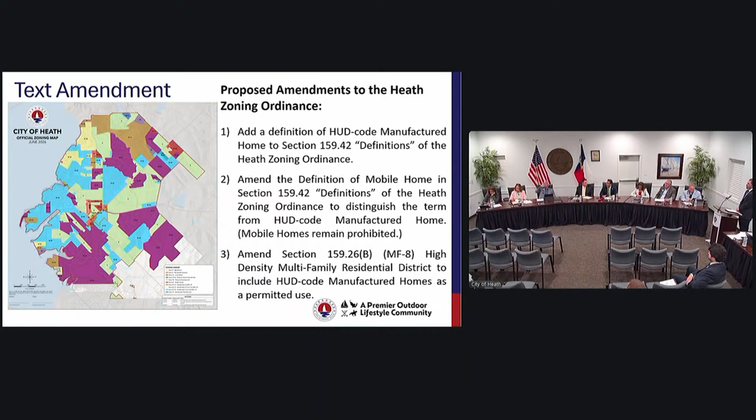We started looking across all the different future land use of the city of Heath. Heath is very dynamically different, as I get the opportunity to talk to mayors all across Northeast Texas. We're really more rural estates, and our lowest standard is one home on one acre. But we do have a future land area that's been dedicated to this type of affordable housing opportunity, and it's been there for a very long time.

I even reached out to some past council members, in fact past Mayor Pro Tem, and asked them about this. In their terms, they kept this and said, hey, this is what that's for. I thought this was a great recommendation by staff, that this would be a small footprint that would allow for that potential opportunity. That doesn't mean that's actually what will go there, just that we need to make sure this is codified within our ordinances.

At this time, the floor is open for any discussion, council.

Councilman Dotson: Mr. Mayor, I think you know my feeling on this. I feel this is an egregious overreach by the state. This is one in a long line of reclaiming zoning for people in Austin who feel they know what's best for municipalities through the state, when many of them have never even governed in municipalities in this state or any other. We were not consulted on this. We were not queried. There were no forums on this, even though this bill had made its way into committee on four different occasions.

As you mentioned, our state senator clearly voted for this and continues to advocate for zoning control in Austin, and our state representative did not. I think this is zoning encroachment, plain and simple, and this equates to a state taking, much like a regulatory taking if we're looking for easements or anything else. No one likes to be put upon without actually being consulted or having a say or a seat at the table, and in neither case did that take place here.

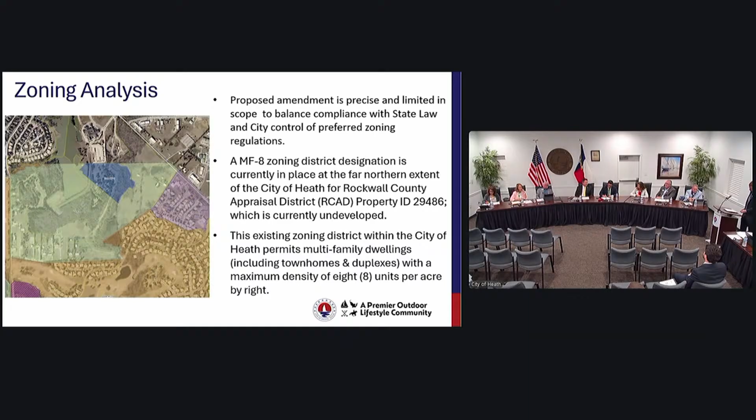Very well, at this time we'll move into agenda item number 6. These are items for individual consideration. 6.A, discussion and action regarding the compensation for the municipal court judge and the associate municipal court judge.

Mr. Alexander's on here. Ms. Gordon. I caught myself, I even wrote it out. You did, I appreciate that, Mayor.

So the item before you this evening is to discuss and act on compensation updates for our municipal court judge and our associate judge. Both our judge, Tim Hartley, as well as our associate judge, Roy Stacy, were reappointed last month to serve as our municipal court judges to assist with our municipal court operations. And so as a city, we have been reviewing our municipal court operations as a whole, which also included looking at the compensation of both our judge, associate judge, and prosecutor.

And so in doing so, we reviewed some operational items as well as studies from comp cities and realized we were a little bit below market. And so we want to make sure that we are remaining within market for our pay for our hardworking municipal court judge and associate judge. During our budget, we also accounted for potential increases in pay for both of these positions. So this evening, we are recommending an increase from $175 hourly for their services to $200 an hour for their services. We are recommending approval of this item, and I would be happy to answer any questions you may have.

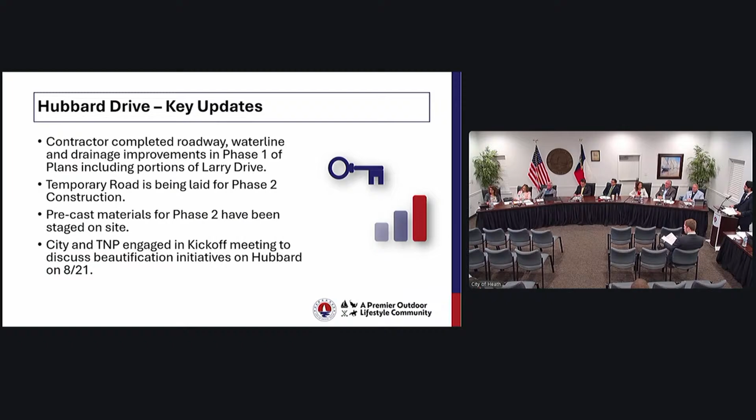Another thing we did, which you don't see on this slide, is coordinate with our Freeman Milliken, who is our design engineer for the 2026 fire improvements. He's looking at how we can connect this beforehand during construction so that way we don't have to bore underneath the roadway and get it taken care of now.

The detour I don't have up here, but it used to take you around and clips off almost close to half a mile to about three-quarters of a mile as it goes around. This detour will be for the northbound. We plan on having phase 2A, the southerly portion of the road, finished in mid-October of 2026, with a scheduled completion at the end of December for the whole project.

Next, I'll go into some photos so you can see the progress here. This is Hubbard Drive, taken looking southbound. This is a 36-foot wide pavement section that we now have. You can see the broom sweep finish. The traffic control is still up in this photo, but what I want to showcase is the next slide, showing what the road used to look like.

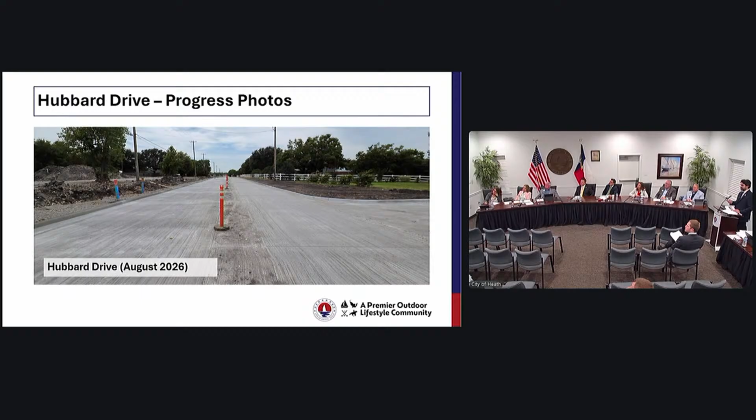This is also Larry Drive, which was also paved. You can see some of the formwork for the storm drain, which is crucial for this roadway. If you remember from the budget workshop, I talked about how some of the drainage improvements would be happening here on Larry Drive, which is going to be key for keeping that roadway and pavement good for years to come.

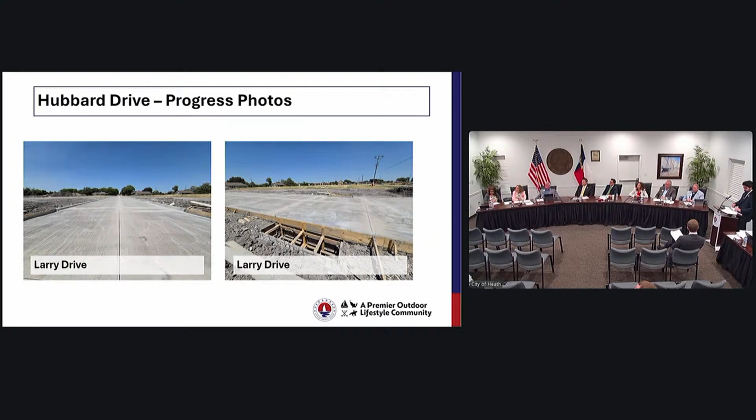I also wanted to showcase some of the precast materials being stored on site. These are 48-inch reinforced concrete pipe along with some 6 foot by 3 foot boxes. This just shows that the contractors ordered the precast materials. Sometimes these have a long lead time, and they've already got them on site ready for their phase 2 progress. I'll take any questions on this project if you have them.

Council, any questions? None at this time. Thank you.

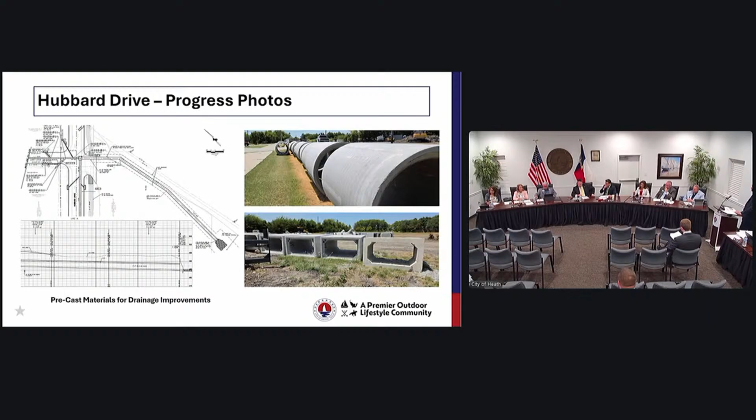The next thing I'd like to go over is the Hubbard Trail. This is the best exhibit I have of it, but it runs along this red line connecting Heath Golf and Yacht Tract 10 to Heath Golf and Yacht Tract 14. If you follow my cursor, you can see the outline of it.

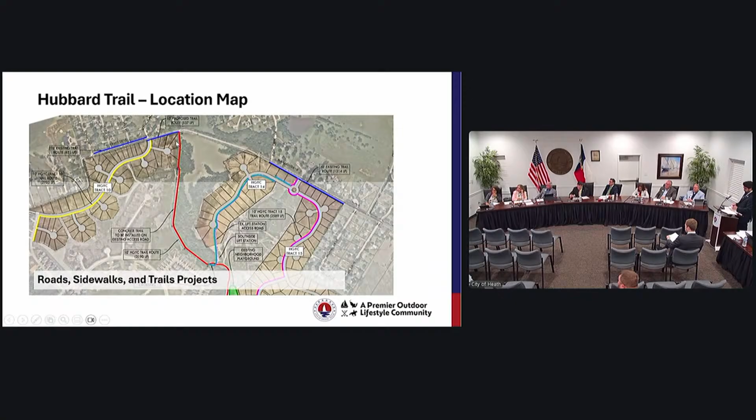Most recently, we were waiting to hear back from the City of Dallas, but I decided to look on their agenda items at the City Council, and it looks like our trail and sanitary sewer easement, along with the temporary workspace agreement, was approved on the August 12th City of Dallas Council meeting.

Our next steps are to coordinate with the developer further to see where we're going to land on this project. It's kind of involved with both the city and the developer from Heath Golf and Yacht, because we also have a lift station that's going to be decommissioned as part of the construction of this trail.

I have a little exhibit there of that easement that we acquired as well. I'll take any questions on this one if you have them.

Very well, council, any questions? Councilman Dodson asked, what's the estimated time of construction and closure on this?

Thank you for that question. I talked with Rob, who let me know he's ready to go, but one thing we want to ensure is that this trail is fully ADA compliant, because this road has some areas where water crossings are, and actually one of them washed out. He said once we're final on design, he can be ready to go and have it done in 90 days from beginning of construction to end of construction. How we get there is really the next step we have to discuss with them, to make sure it's fully ADA compliant for that trail.

Understood, thank you very much. Any others?

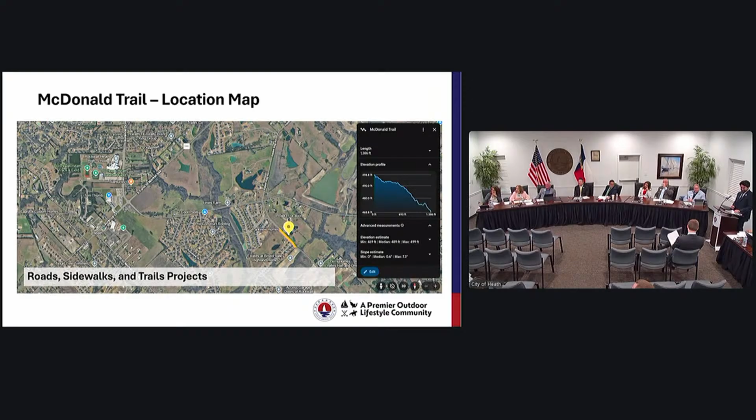So next is McDonald Trail. We provided final comments to the designer for the construction plans. They're very minor updates; we just wanted to make sure a few things were worked out for constructability.

We're also in the process of getting them to update the 4 easement deeds along McDonald Road, because there were some small discrepancies between what we're seeing on the plans and the right-of-way plats. We want to make sure the easements actually acquire what we need for the trail. Once that process is completed, we'll want to coordinate with the third-party utilities ahead of time, because there's a guy wire that needs to be moved as part of that trail on the plans.

So we're trying to be proactive about that. The city has received the remaining funds from the developer for construction of this trail, and the preliminary schedule is about 3 months to have the final completed construction documents and easements. The critical path for us is going to be the easement acquisition, and then another 3 months to construct, where the critical path will be utility coordination.

Okay, very good. As you're looking at this access, are you looking at the back property as well? Correct, we're looking at Stoneley, the connection of the 2 subdivisions in the back of Stoneley to this one, Bristol Valley. That matches the master trail map. Thank you. Mitch, did you have a question?

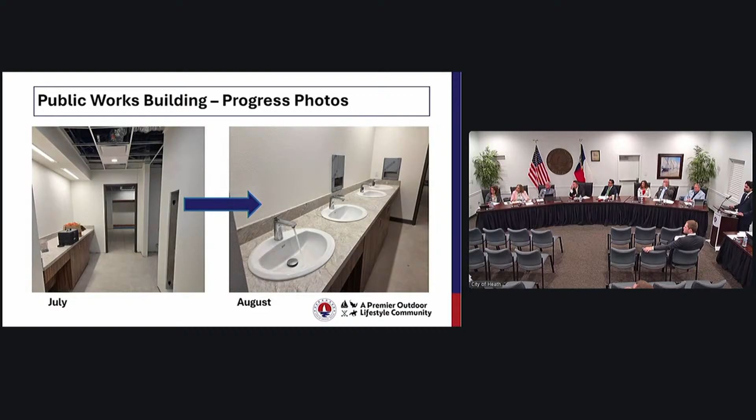I'm ready to take any questions on this one. No questions, great job, great job to staff. I know it's been a long time coming. I love the color scheme. Ms. Gordon, great job.

That was a joint effort with our Public Works staff and our Public Works administrative assistant, and they tried to keep me out of there every time I'd walk through. I'd go, wait a second, I don't know about that color, that looks like that mortar I was not happy with. I'm just kidding, no, you guys did a really good job.

Looking forward to, what's our move-in date? So right now, we're at the stage with the contractor where we're trying to ensure the quality is where it needs to be at.

Even before the furniture, one thing we looked at is we actually did a pre-punch walkthrough to make sure, before you get all the furniture set up, let's walk through the area, make sure there's not any exposed nails, drywall screws, anything like that inside the building. We've been communicating with them consistently, almost daily. But right now there's one thing holding us up, and it's a fire inspection. So that's really what has to take place.

And it's not on the chief, I just want to make that clear. What the contractor was telling me today is that he was going to get all the remaining signage for the riser room in the fire areas that need that to pass the fire inspection, and he was working through that right now.

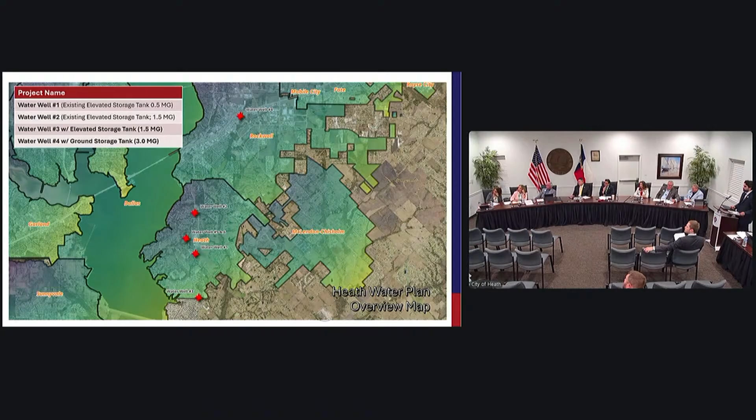So well number 1, I did want to give an update since the last update you had was that this pump was not operational. We have a temporary pump in this spot. It has been replaced and is now working.

The Public Works team worked closely with C. Miller Drilling, which is our contractor for it, and they replaced some bad electrical equipment, as well as they replaced the pump. One thing that we learned in this process is that we do need to have a stockpile of some of these electrical items so that they're ready to go in the future.

And so I think when we get our permanent pump, that's gonna be a lot different. But these ones, because it was a temporary pump, we also didn't have some of these fuses or capacitors in stock, and it could have been the pump itself too, in fact, so it could have been a number of things. But when we tested both out and replaced both, it ended up working.

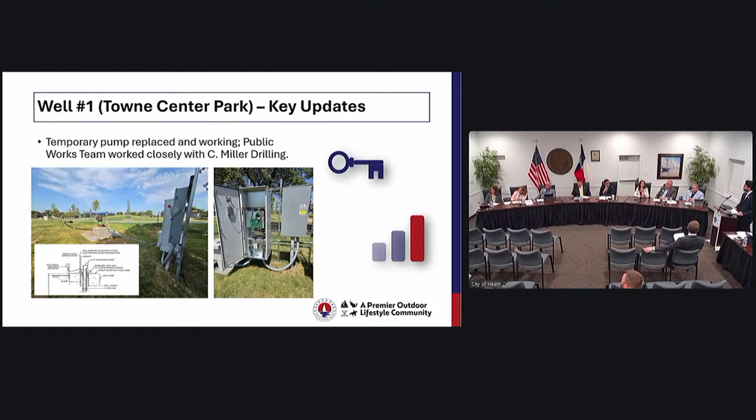One thing I wanted to go over is the schedule for water wells 2 through 4. So on page 38 of your packet, this is the newest update provided by Kimley Horn. What I do want to note with this Gantt chart is there's about a 2-week shift in the timeline.

And that came from needing to acquire the temporary construction easement at the Heath Golf and Yacht Club at well number 3. So it's not too much of a difference. Some of the items may slide over just half a month or so, but this is a 1-month Gantt chart.

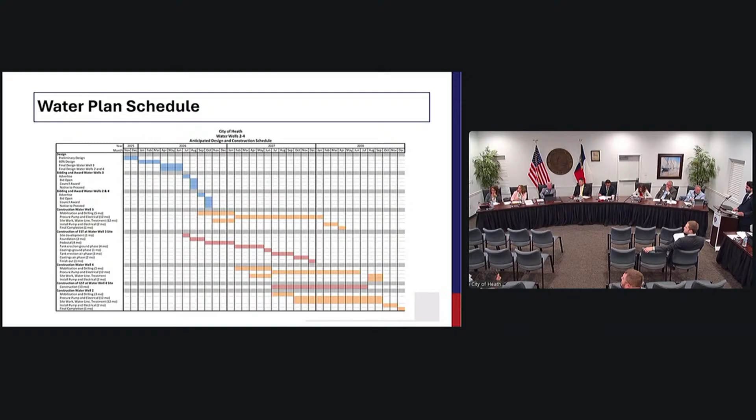For well number 3, it was currently open for bids. That closed today. What I will tell you is we have 2 bids that are underneath the OPCC right now, so we had 3 bids total. Our OPCC for this was about $7.3 million, and so that was great news.

The elevated storage tank had a pre-construction meeting, as I mentioned, on August 20th, and we also received conditional approval to construct TCEQ water well number 3, giving us that conditional approval for the well.

Water wells number 2 and 4, very similar update. These ones are not in construction, but we did also receive conditional approval for the construction of wells 2 and 4. Any questions on those before I move on?

Councilman Dodson: So with water well number 3, we have water well number 1 coming online on or about next summer. When is water well number 3 projected to come online?

Let me take a look actually at the schedule I provided. Number 3 on the Gantt chart is December 2027.

Gotcha, yeah, correct. Second question, given the long pole in the tent here is always the pumps, whether it's a submersible pump or one of these big monsters that we're waiting on for maybe a year, is there any way to pre-order some of the components so that we can shorten that cycle in the likely event that we will need a spare and won't want to wait an entire year before one comes available?

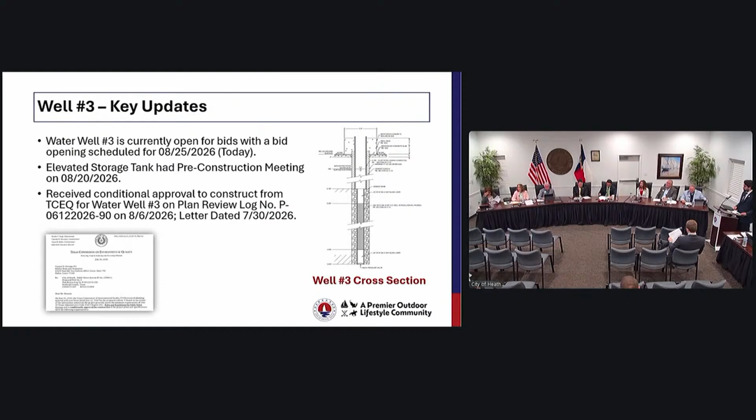If there's nothing else, I'll go into our fire flow enhancements. So I'll talk about Candlelight, which is currently in construction, and maybe this is the first time you've seen this, but the 2026 fire flow projects are in design, and I'll touch on that in just a moment. So the Candlelight fire flow, in location, is by the high school, right over there.

Trying to remember what that's Terry Lane that branches off of. Yep, that's it.

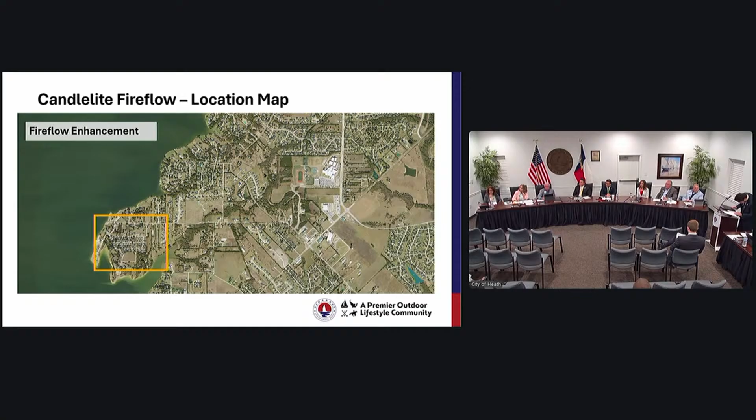And so, some key updates for this project: it is currently at 50% construction completion. The work began on June 24th, 2026, and right now we still have an estimated completion date of December 2026. I put weather permitting in there because there may be some rainy days, but they've been moving quite fast. If you look at this map, I'm showing how much of the main water line they've actually completed boring for.

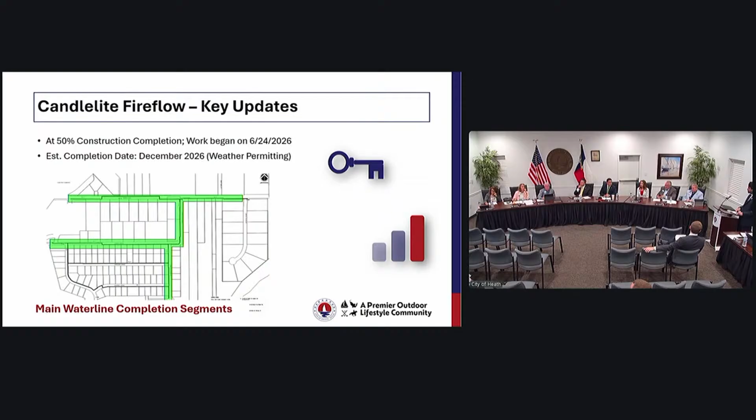Most recently, they completed the south portion on Candlelite, which is this segment right here, and they also completed on Lemmy Drive, this portion right here as well. So I'll go into a few photos. One more important update is that they are going to connect the 8-inch line to the main line tomorrow, that's one of their items they're going to do during the day.

Here I wanted to showcase some of the construction they're doing. You can see one of our brand new shiny fire hydrants in the photo, along with crews working in this spot. They're using a soil displacement hammer to bring that connection, the blue tube on the left, over and underneath the roadway, so there's no open trenching on our pavement. They're doing this all underground, driving in and pulling that HDPE line back through. You're also looking at one of those corporation stops on the HDPE line, showing the connection that's going to service these homes for water service as well as irrigation service.

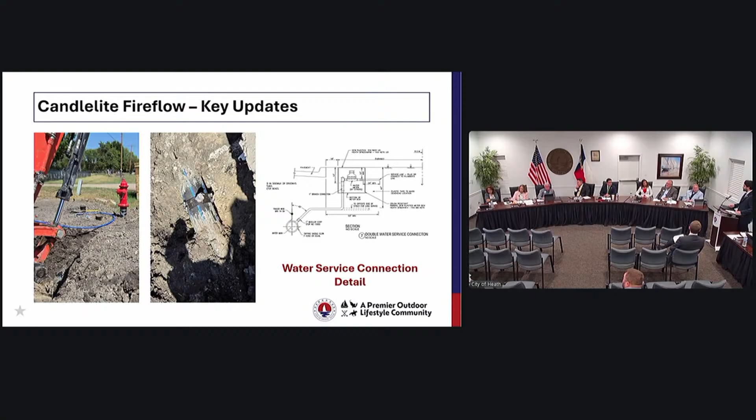So the last update I have is for the 2026 fire flow projects. This is a location map, also provided on page 39 of your packet. In discussing these projects with Freeman and Milliken, they'll be at 30% design by the end of this month, so we're expecting all these green projects to have a construction notice to proceed by the end of the year. The two other projects, 6 and 4, Hilltop Estates and Las Lomas Loops, are more complicated because they're next to bodies of water. One actually loops around an entire lake, so we're making sure we have the proper offsets for construction. The Las Lomas one is also complicated because it goes through a tree line, and we're trying to conserve as much of the trees as possible and find the most optimum alignment to avoid destroying trees in that route.

Any questions on this one?

No questions. You said the engineering firm plans to be done by the end of the year? Yes, at least for these, the ones in green. For the red ones, number 6 and number 4, we're working with them right now, looking at the alignments they provided to ensure that's not going to cause any issues. They're relying on us to do a little background work — that's where we last left off. To get those moving along, we just have to review everything to make sure we're not demolishing too many trees or causing an issue with the water.

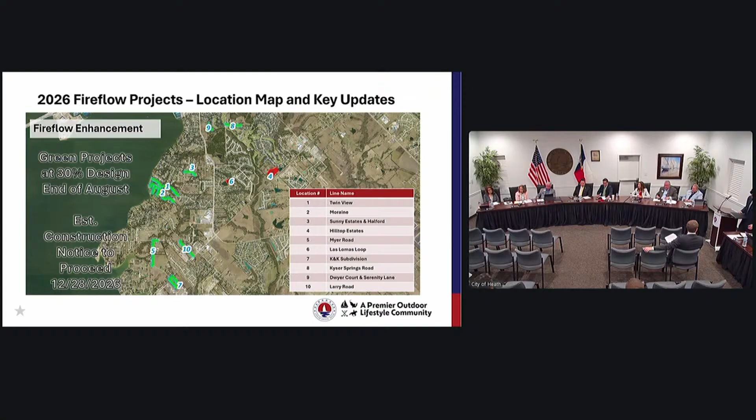Thank you very much, great job. I saw into an engineer's mind in that presentation. That was great.

Is that your first presentation in-house? I like it. Very exciting to have an engineer on staff in the city of Heath, and we're very proud to have you.

All right, moving into agenda item 6D, discussion and update on the construction of DPS Station 30 and 31.

Chief Seery: Good evening, Mayor and Council. Tonight I have Marcus again from AGCM to do a presentation on the construction of 30 and 31. The most exciting thing I'm happy to tell you is Thursday the contractor will be on site for 31 to start going vertical with that building. Terrific, very good.

On site, on budget, under budget? Under budget, okay, all right. Not yet, not yet. Man, I set the bar high. All right, well, good luck in the rest of your presentation.

Now let's get into the bad news now. Okay, thank you, Mayor and Council, for allowing me to present.

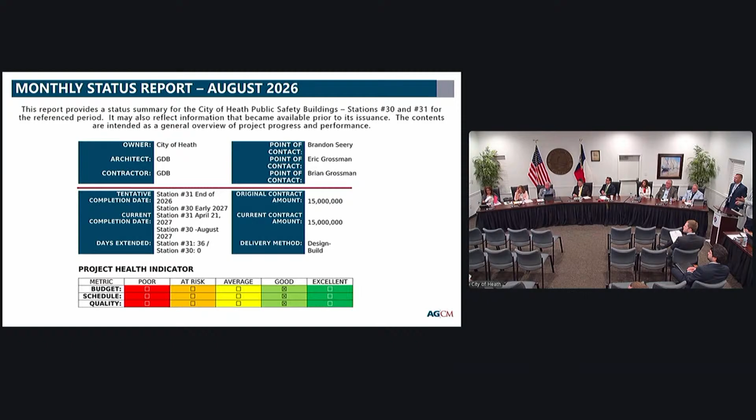Just a quick brief update. The biggest thing to discuss is there was a 36-day time extension added for Heath Station 31. Really, it was just completion. We were planning on completing in late March, now it's just going to be late April for substantial completion. The contractor incurred roughly, with the delay of the select fill and then the moisture issue with the piers, a cumulative total of about 87 days, and really they just claimed the 36 days, which was truly the unforeseen factor. The coordination with the select fill was something kind of self-imposed, so to speak. But overall with that, everything is looking in good health, budget, schedule, and quality.

One thing is, he's still trying to work to get those days back. Yeah, we're still thinking that he's going to be able to tighten it up from there, but we're just still showing where the furthest out that we anticipate for that project to be turned over.

So for Station 30, we did have our test piers completed on Friday. Right now the building pad's complete, and all we're doing is working on underground - this was the 8-inch fire line loop, primary services in place, and then all the branch wiring and branch lines for electrical lighting and everything. We also have our fire hydrants in place, and then we did pour this head wall, which was the main drainage channel for the fire lane entrance for the site. That was poured on Friday last week as well. So this project is looking pretty healthy, finally moving forward.

Hopefully by this week we'll start getting some piers ongoing, and by next meeting we're hoping we'll have formwork and getting really close to approaching the slab pour. You'll note that we do have all the structural steel package on site ready to go, just need to get fire lanes in place and then a slab in place to be able to put it on.

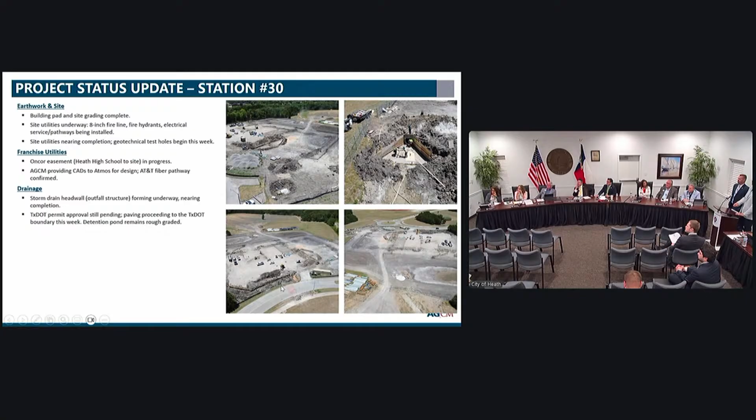Still coordinating with franchise utilities. The biggest one right now on my mind is Oncor, just working on getting that easement. I think we got like 20 feet of easement with the high school, and then branching through the EDC and then crossing the street, roughly where that colored concrete is, going to be a little bit to the left of that, then going into Station 31.

Chief stole the great news - we poured on Wednesday last week, so we're just waiting on the 7-day break to make sure that we meet design strength, and then we're getting ready to roll on the steel. By the time we have this next meeting, this building should be fully enclosed, watertight, to where we're in great shape on this site. We got all our fire lanes in place. If there's any rain event, it's really going to be maybe a 1-day impediment, and then we'll be able to get back out there and going. That's fantastic, we're just going to be moving really fast once we get out of the dirt finally.

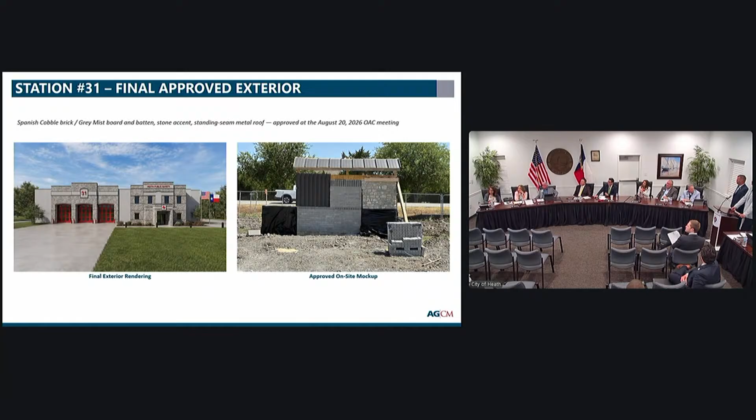Payment updates: Station 30, for design cost, 93%. Construction costs billed up to this month, about 22%, with big components being structural steel and the pre-ordering or prepayment for the elevator. For Station 31, 100% on design cost, and we're almost at 40% for all the foundation work, continuing on with that. That's all I have for today.

Very good, any questions council? So Chief, does that elevator just go right to your office? It goes up to the second floor, to the conference room. That's the setup you got going? It's a secured elevator.

As a good reminder for the record, for anybody listening for the first time, we've talked about it a number of times, but this is within the bond that was originally issued, and originally the plans were for one station. I want to continue to remind everybody that we were able to expand that to 2 stations, thanks to the hard work of Chief Seery doing his due diligence to figure this out, allowing us, once these 2 stations are up, to move out of city hall. So again, I'll continue to say that. Thank you, AGCM, great job.

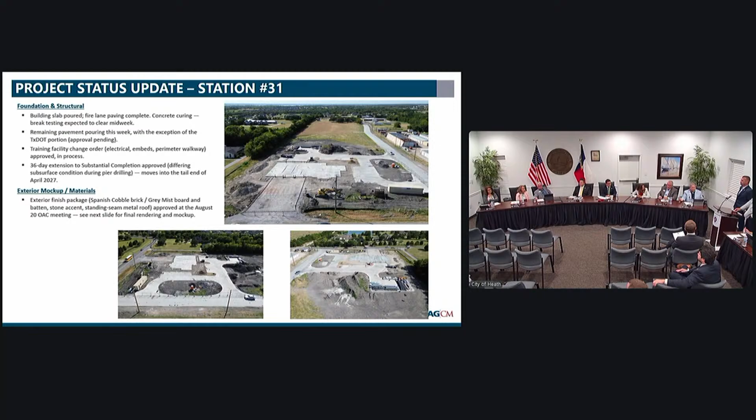Perfect, last question from me. Go back to that last slide. Oh, wrong way. Are we going to be able to have the flags at the same height? Yes sir, it's a Texas thing. That's going to be a Grossman design, probably. Very good, 3D, whatever will be lit as well. Perfect, thank you. Going throughout the whole night too. Yes sir. Very good, thank you sir.